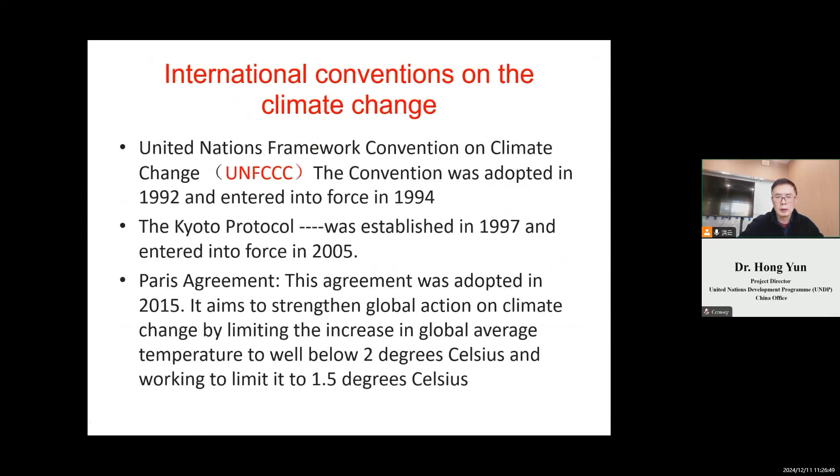We also have another environment convention for protection of the ozone layer. I think everyone maybe knows the program for ozone layer protection. It is derived from the Vienna Convention for the Protection of the Ozone Layer. The convention was signed in Vienna, so we call it the Vienna Convention for the Protection of the Ozone Layer. And based on the Vienna Convention, the parties held the meeting in Montreal, and we adopted the Montreal Protocol under the Vienna Convention.

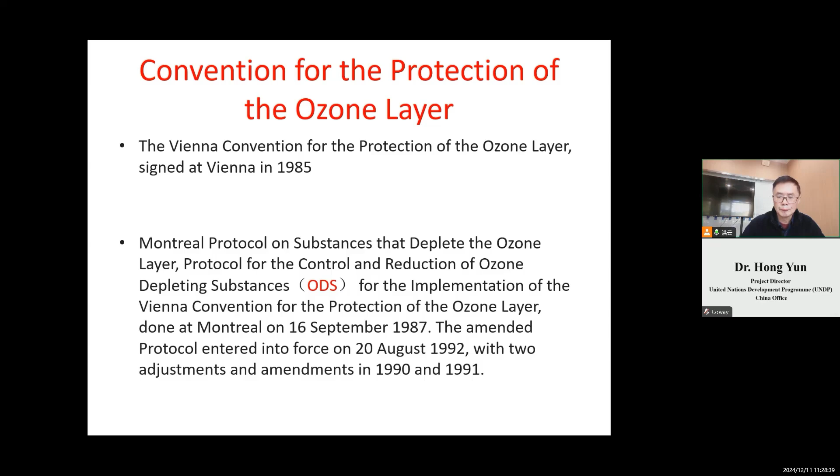The Montreal Protocol was signed on 16 September 1987, and the protocol was amended on 20 August 1992, and in the amendments we made some adjustments, respectively in 1990 and 1991. The Montreal Protocol stipulated that substances such as CFCs will be phased out by 2010, and eliminate or phase out HCFC substances by 2030.

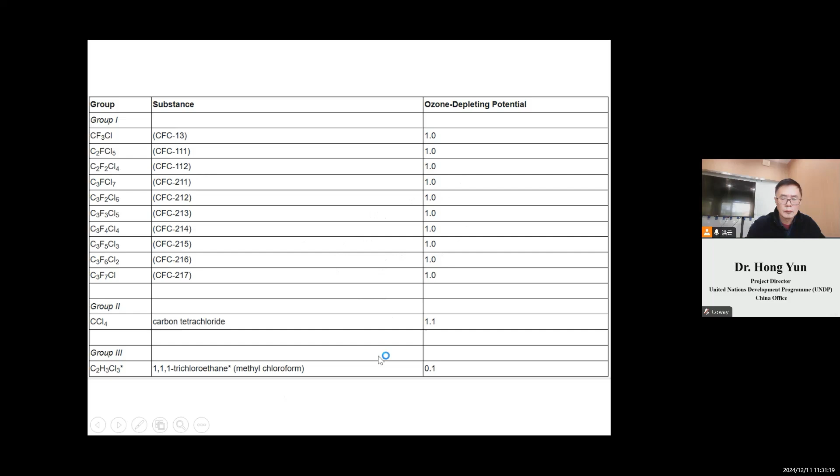So this is also the list of CFCs under the Montreal Protocol. Because CFCs are artificial chemicals, they are very harmful to the ozone layer. But now I would like to introduce CFC uses. CFCs are widely used in industries and in products covering various parts of our lives. For example, we have CFCs for refrigerants. You can see from here, these are the refrigerants of CFCs and HCFCs.

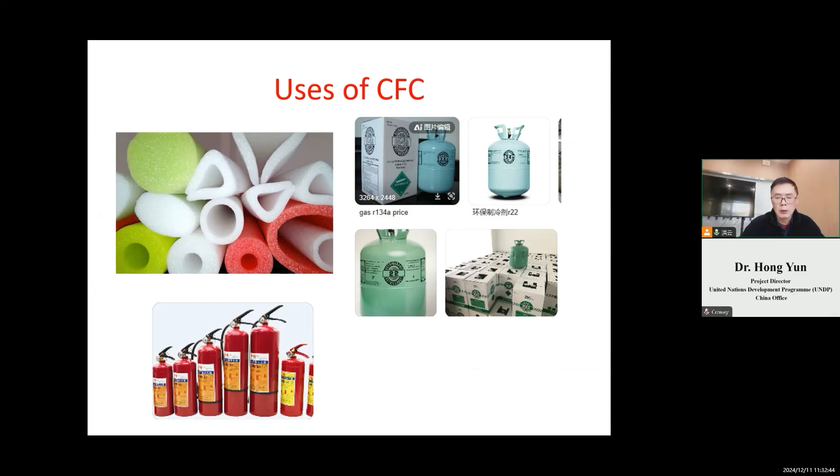And CFCs are also used in the foam sector. This is the foam picture, and also extinguishers use CFCs like halon, halon 1211. Those kinds of substances are very harmful to the ozone layer. And also in the refrigeration sector, in China, the refrigeration sector is divided into two kinds. First is AC, that is air conditioners, like this air conditioner.

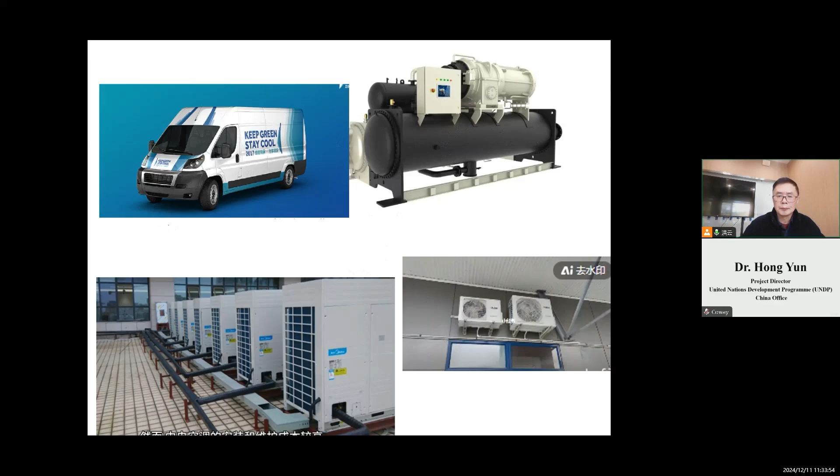The air conditioners are also installed in vehicles like cars and minibuses, and we also have commercial and industrial products, and that kind of equipment consumes a lot, maybe 300 kilograms to several tons of CFCs. So CFCs faced the phase-out timeline; according to the Montreal Protocol, all these substances were eliminated before 2010.

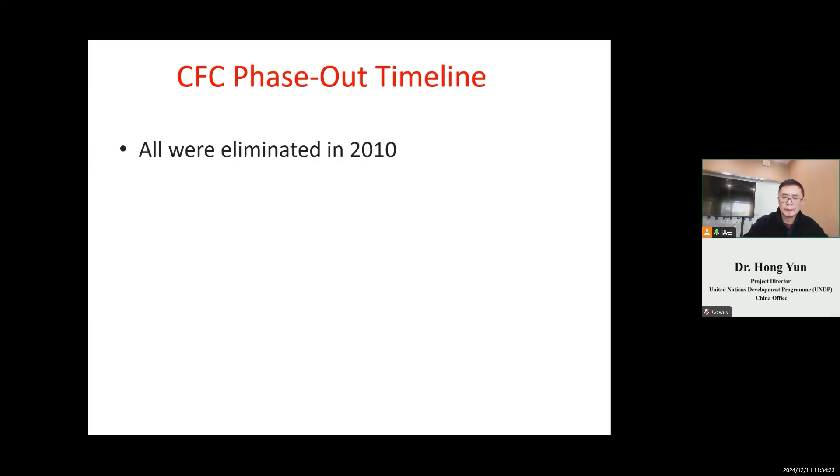This is the list of HCFCs. Compared with the CFCs, the ODP, ozone depleting potential, of HCFCs is very low, but they are still very harmful to the ozone layer, because every year the world consumes about 1 million tons of HCFCs. HCFCs also have a global warming potential. For example, HCFC-22's GWP is 1,810. It is also very big.

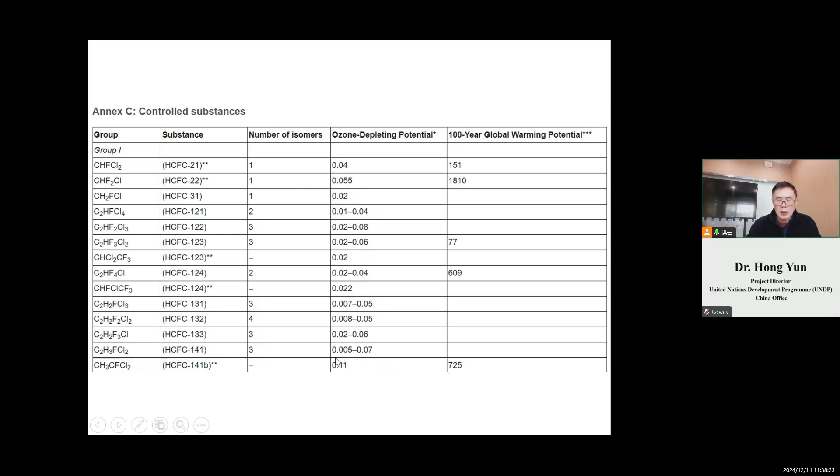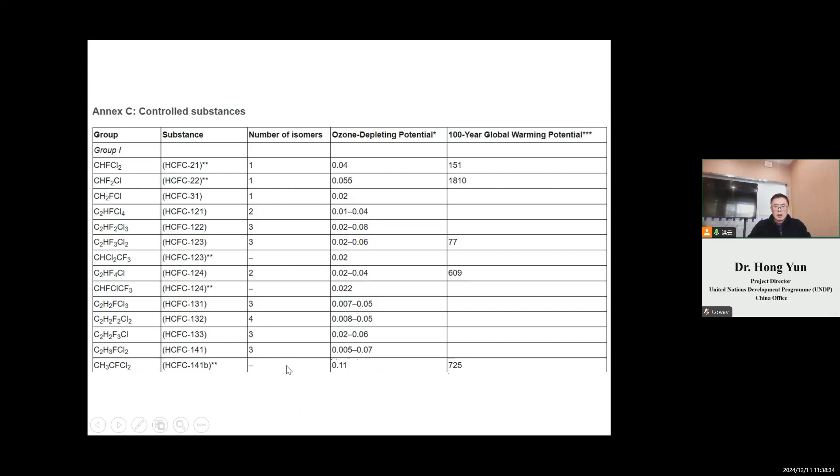Here is the list of HCFCs. We also have HCFC-141b, whose GWP is 725. It is of very high GWP. In the list of HCFCs, the main chemicals are HCFC-22 and HCFC-141b, because HCFC-22 is used for refrigerants, and HCFC-141b is for the foam sector. So in China, we consume a lot, about 300,000 tons to 400,000 tons a year.

These are the HCFCs. We also have another list of HCFCs, and for other kinds of HCFCs, the GWP is very low, but they still have GWP.

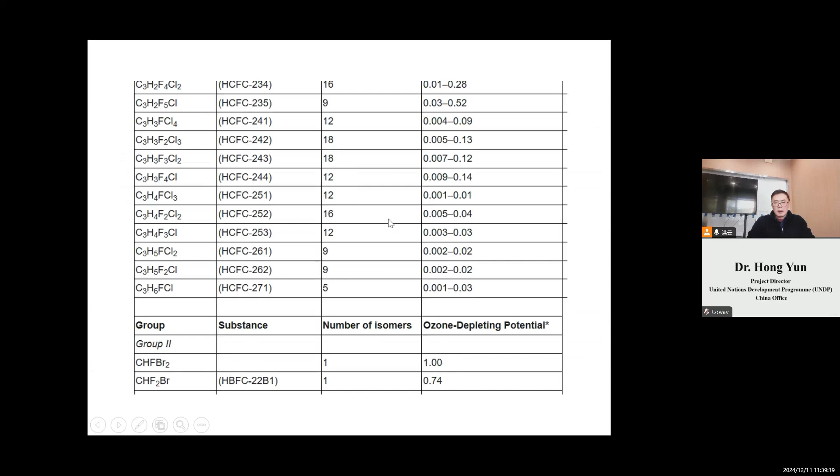Now, I would like to introduce the work to phase out HCFCs in China. China has some new kinds of technologies and does some research. We are doing the work to phase out HCFCs. In household air conditioners, we use the hydrocarbon propane, which according to the refrigerant category is called R290. This is a hydrocarbon material, so the GWP is very low and the ODP is 0. Now we mainly use R290 to substitute HCFC-22 in the air conditioner sector in China.

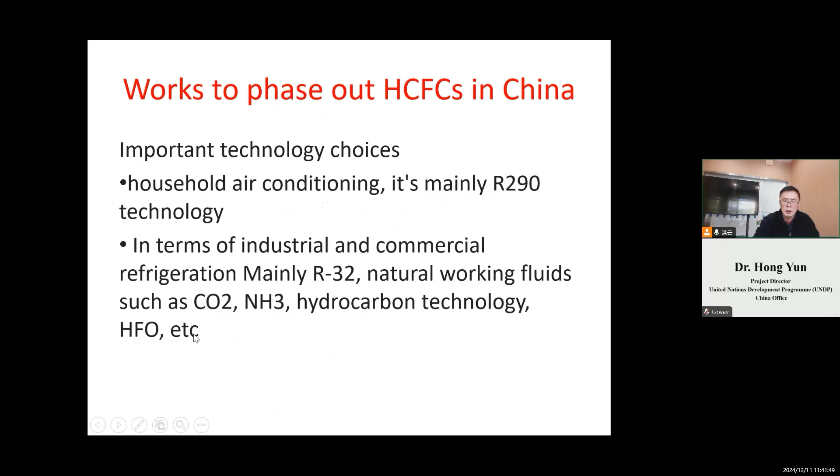In industrial and commercial refrigeration, now we mainly use R32, and we also use some natural working fluids like CO2, ammonia, hydrocarbons, and also HFOs. In China, we have a lot of projects in Haier, Midea, Gree, Dalian Refrigeration, Yantai Ice Wheel, Dunan Environment, and Hisense. We have also phased out HCFC-141b in the foam sector, mainly for foam panels. We also use HCFC-141b as a clean agent in the solvent sector.

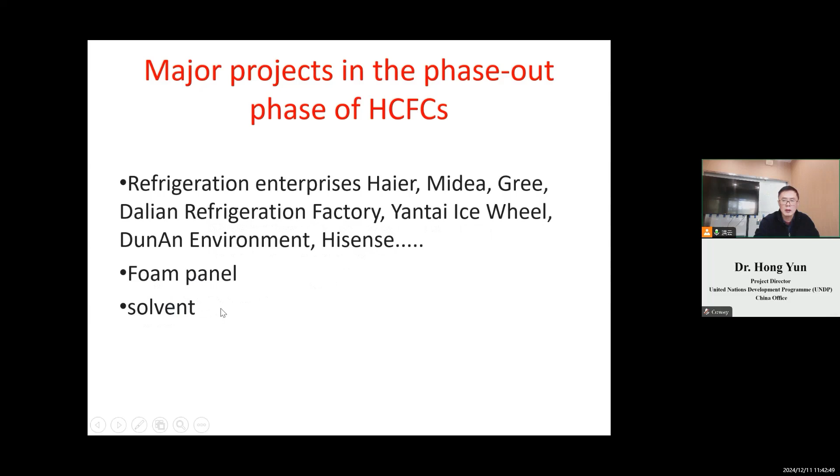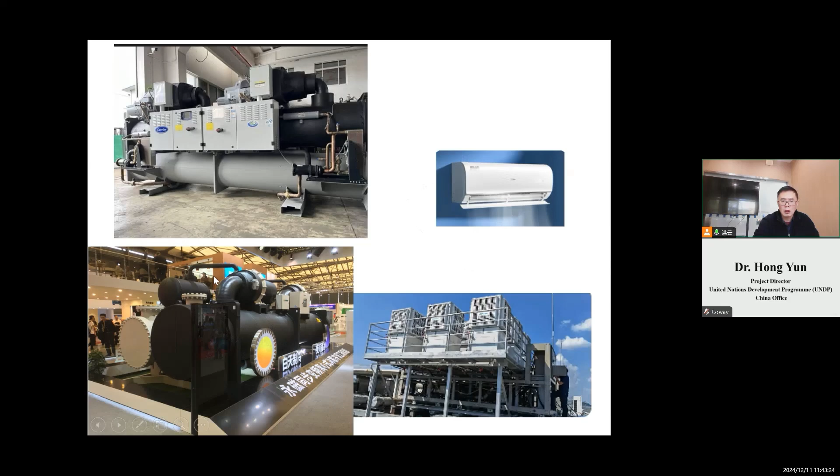This is the picture of commercial refrigerators. In China we now use R290 to substitute HCFCs, and this is the picture of the industrial and commercial refrigeration system. This is the foam sector with foam panels. The foaming agent is HCFC-141b, which has very high GWP. So when we do the work to phase out HCFCs in the foam and refrigeration sectors, we not only contribute to ozone layer protection, but also to climate change mitigation. This is the foam panel for the refrigerator; the panel includes the foam.

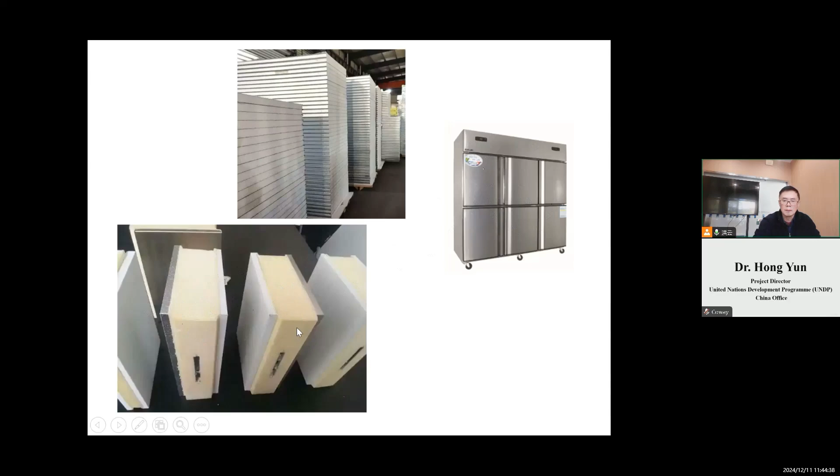I would also like to introduce the Kigali Amendment to the Montreal Protocol, which includes HFCs. HFCs are actually not ozone depleting substances, but they have very high GWP. HFCs derived from the process to phase out HCFCs and CFCs, so HFCs were included in the Montreal Protocol, specifically in the Kigali Amendment. It was adopted in October 2016, when the Meeting of the Parties to the Montreal Protocol was held in Kigali, Rwanda. So we call it the Kigali Amendment.

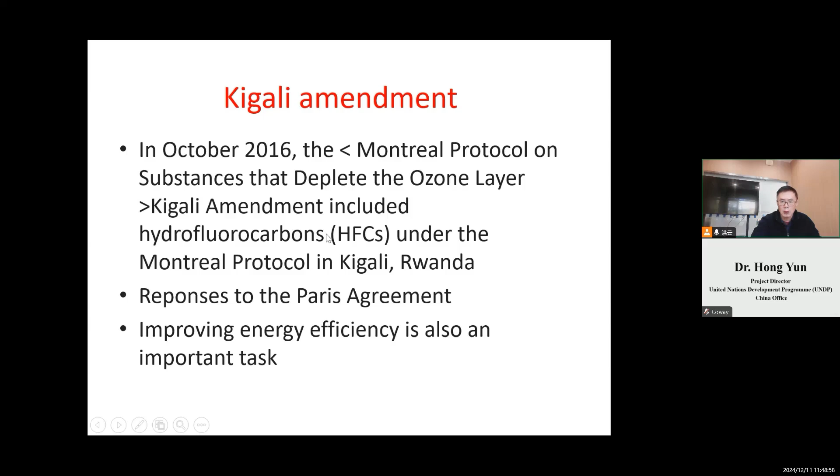But according to the estimation of scientists, with the Kigali Amendment and the Montreal Protocol, if we phase out all the HFCs, CFCs, and HCFCs, we can achieve the target of 0.5 degree Celsius. So the Montreal Protocol can contribute 1/4 or 1/3 of the temperature reduction. So the Montreal Protocol is very important for ozone layer protection, but also very important for climate change.

Now we would like to introduce some requirements for China to restrict the production and consumption of HFCs in China and also in Article 5 countries. What are Article 5 countries? In the Montreal Protocol, we have a definition for Article 5 countries. Article 5 defines the countries by their consumption of ODS or HCFCs per capita. We call those countries Article 5 countries.

We also have another article, Article 2. Article 2 countries consume more than the Article 5 countries. So Article 5 countries, in other words, are mostly developing countries.

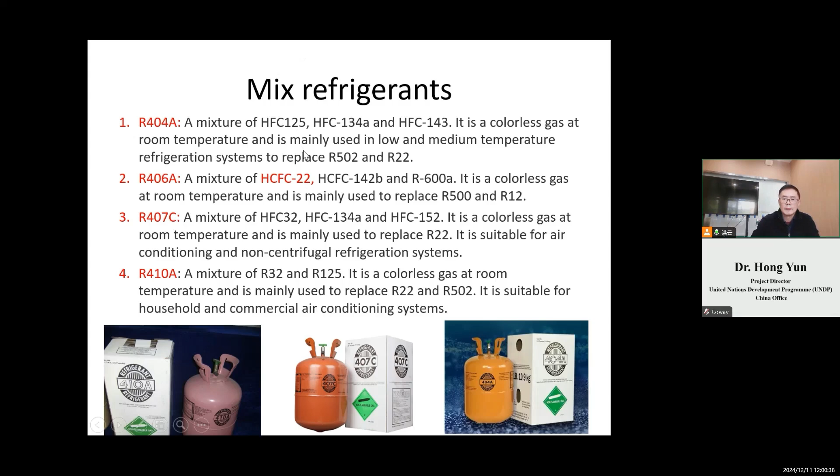Now, in order to phase out HFCs and HCFCs, in China we have been doing research on natural refrigerants, for example ammonia, CO2, hydrocarbons, and also a new kind of material, HFOs. HFO is an artificial, man-made material developed by Honeywell in the USA. The problem with HFO is that although it has zero ODP, it still needs testing of its effects on human health.

Also, the price of HFO is very high. For example, now in China in the AC sector, if we use HFO as the refrigerant, its cost can cover the whole price of the other refrigerant. So in China, the HFO price is very high. I think it is more than 200,000 US dollars a ton. So you can see the price is very, very high.

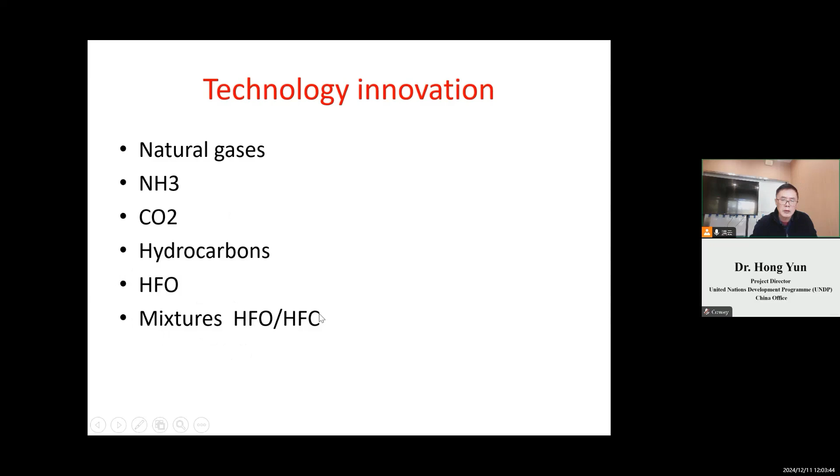That also hinders the use of HFO in the refrigeration sector and the foam sector. HFO can be used for refrigerants and also as foam agents. We also have mixtures in order to reduce the price and the GWP of the refrigerant. China also cooperated with some developed countries to develop mixtures of HFO and HFCs. For example, this is a mixture of HFO and HFCs.

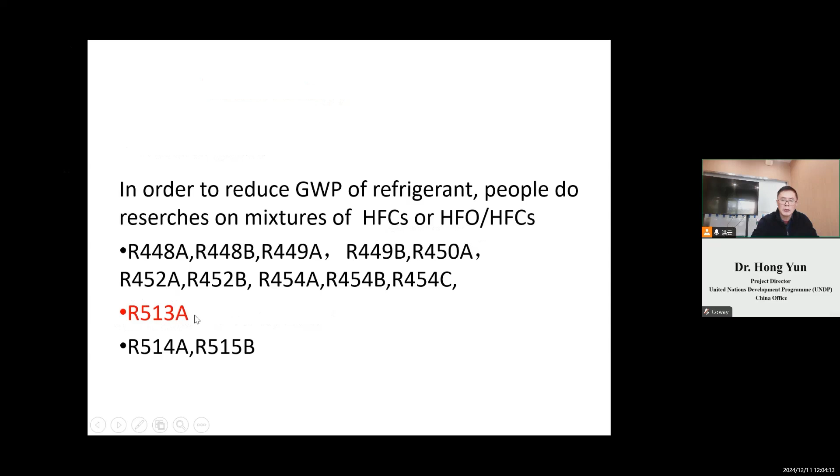I would like you to pay some attention to R513A. This material is a mixture of HFO and HFCs, HFO and 134A. In this way we can reduce the GWP of this material. For example, it has 56% lower GWP. Because the GWP of HFO is 0, and the GWP of the HFC, which we call R134A, is 1,430.

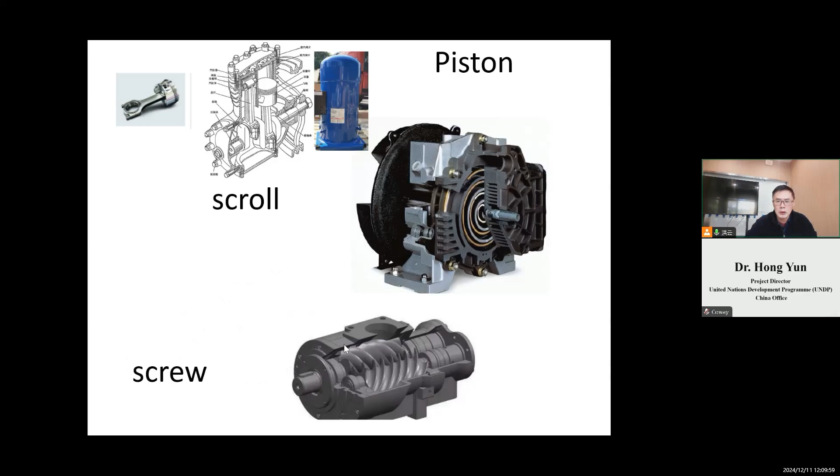And also in China, in order to have green refrigerants, we use CO2 technology and ammonia technology. CO2 is non-toxic, non-corrosive, and also non-flammable. So it is a good refrigerant. But the problem is, with CO2 as a refrigerant, the pressure of the system is very, very high. So we can combine CO2 and ammonia together to have a new system.

In China, a lot of engineers and scientists work together to develop the ammonia CO2 cascading system. This kind of system substitutes R22, and not only phases out ODS or HFCs, but also gets more than 15% energy saving. In a cascading system, the CO2 and ammonia have separate refrigeration systems and they work together.

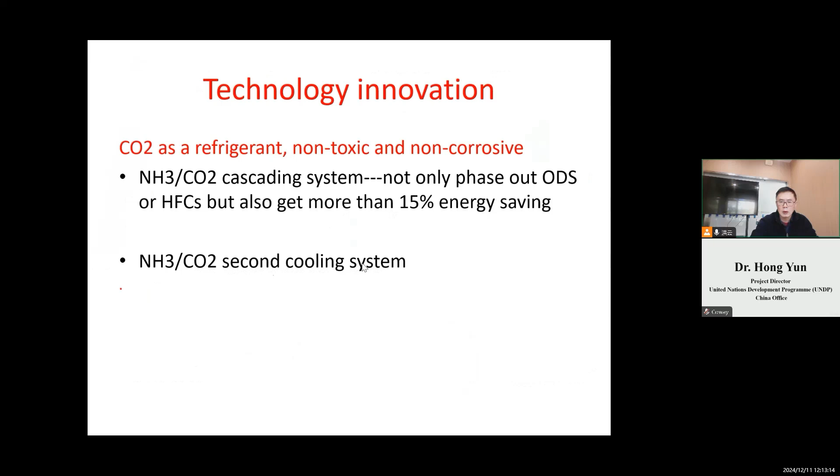But we also have CO2 as a secondary cooling system. For this system, the CO2 is not the refrigerant. It only takes the cold produced by ammonia for the application.

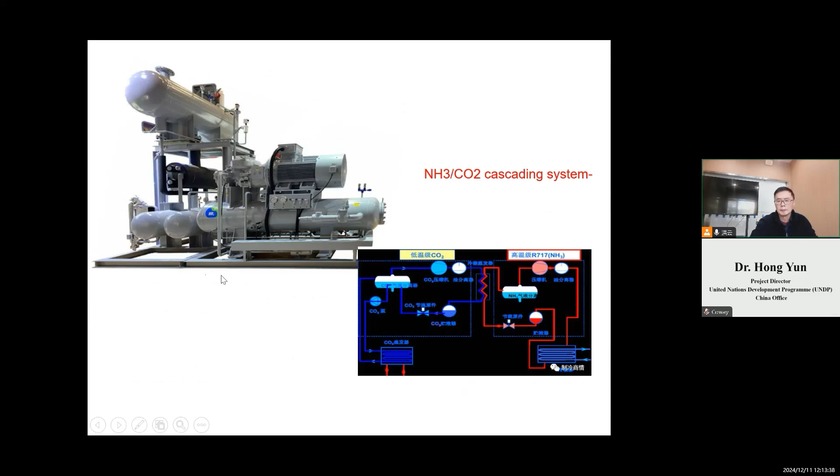So now I would like to say something about the challenges of China. China is the world's largest refrigerant producer and manufacturer of refrigeration equipment. As you know, last year China exported air conditioners to the whole world, about 70 million units.

China is also the largest refrigerant producer. We not only produce HFCs, but also HCFCs, and China is also the largest exporter. So China faces very heavy pressure from the implementation of the Montreal Protocol and Kigali Amendment. China has also led research and development of natural refrigerants like ammonia, CO2, and hydrocarbons in the different sectors.

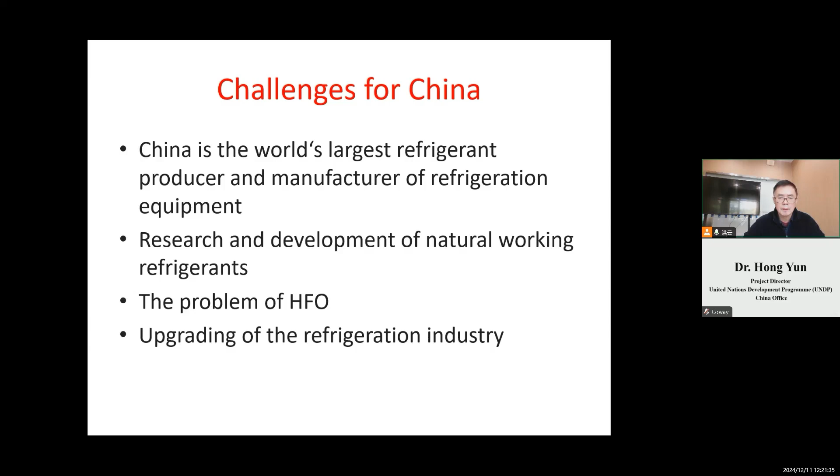So in the future, we have some important sectors, especially for the Kigali Amendment, because HFCs are currently used to phase out HCFCs. In room air conditioners, we have a lot of products still using HCFCs and HFCs, and we have a lot of industrial and commercial refrigeration. So this kind of sector is also very important.

And now in China, all Chinese cars use HFC, R134A, as a refrigerant. And in China, information and computer science are booming now, so we have a lot of data centers. The data centers consume a lot of electricity and energy. So we also face those kinds of problems in those industries.

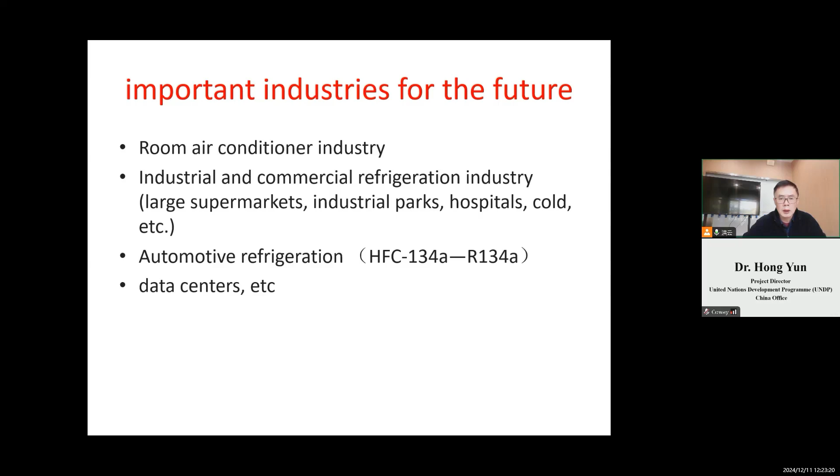But for the Montreal Protocol, we are not only focused on the materials, but we also pay much attention to energy efficiency. You know, 1/4 of the power or electricity in China is consumed by the refrigeration industries in China. So it occupies a lot of electricity. So in China, the refrigeration sector is very important for China to achieve the carbon peak and carbon neutrality targets,

and also substitution of the refrigerants. In the new products, we are using some new refrigerants, but some of the old equipment still uses CFCs and HFCs, and for those old refrigeration equipment at the end of life, the recovery and recycling of the existing refrigerants is also very important.

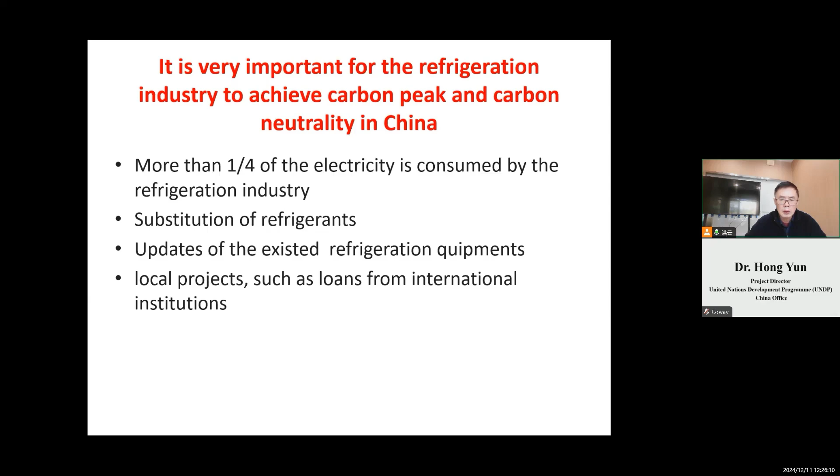So in China, we also have some local projects, for example with the AIIB and ADB, the Asian Development Bank, for these kinds of loan projects to use green energy, green electricity, like photovoltaic electricity or hydropower electricity for that kind of equipment.

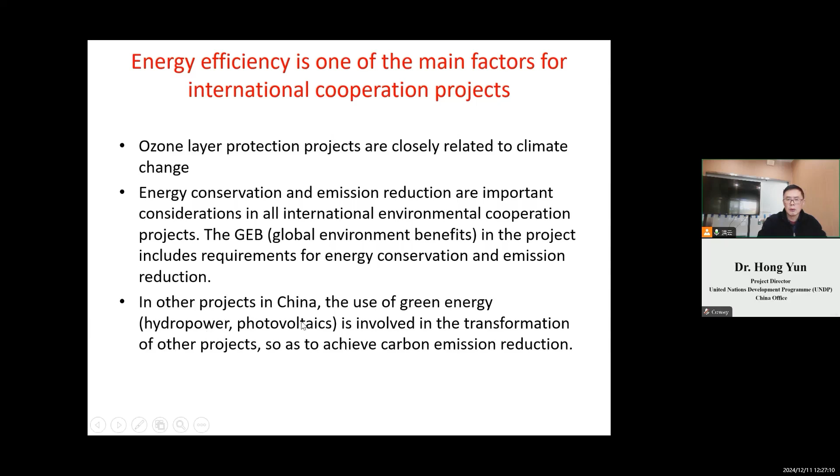So I would like to say the ozone layer protection projects are closely related to climate change. Energy conservation and emission reduction are important considerations in all international environment cooperation projects. So the GEB, that is global environment benefit, is included in the requirements for our projects. In other projects, we also encourage enterprises in the innovation of equipment or technology. We encourage the use of green energy, like hydropower and photovoltaic energies.

Now I would like to give you a brief introduction about the projects in UNDP China. The first is phase out of HCFCs in the industrial and commercial refrigeration sector. As I said in the introduction of the Copenhagen Amendment, now we are in the second phase, stage 2. That is to phase out 30% of HCFC consumption by 2025. In China, we have got 32 million US dollars to phase out HCFCs in this kind of sector.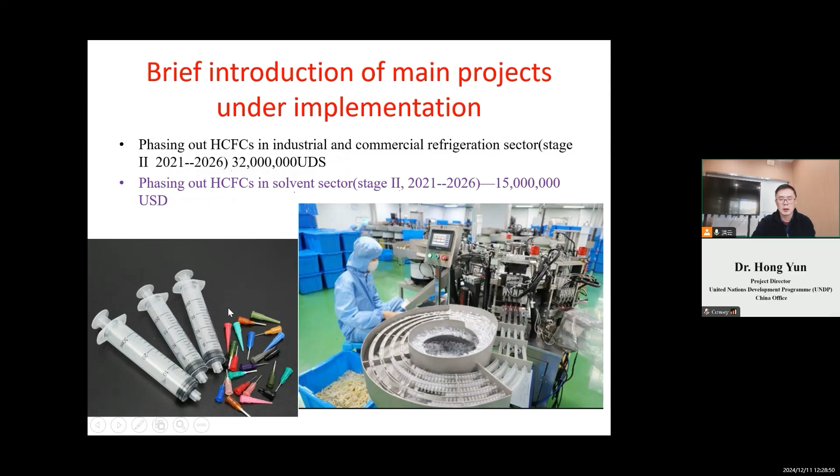We also have the second phase, stage 2, for the solvent sector. This is the solvent sector. This is a syringe. We use some HCFCs as the solvent in this kind of sector. This is the syringe production workshop. This is the syringe. They use HCFCs.

Now in China, we also have the demonstration of phase out of mercury-containing medical thermometers and sphygmomanometers. So in the medical sector, China needs to phase out the mercury. The production of these thermometers and sphygmomanometers must be stopped from the beginning of next year. That is January 2025. China must stop.

But in the market, we still have some thermometers and sphygmomanometers still in use. But new production will stop. This is the mercury, and these sphygmomanometers also use mercury.

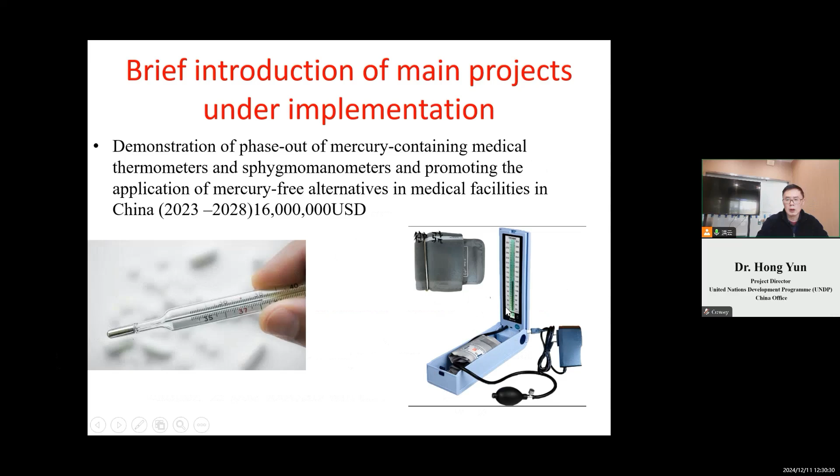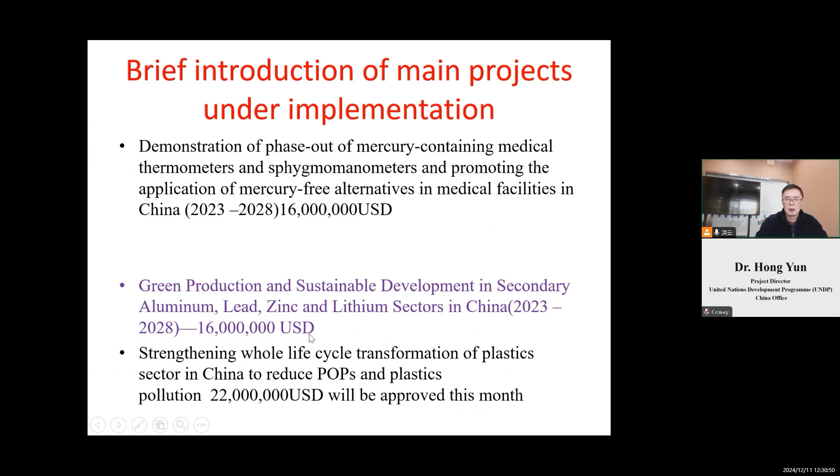We also have the projects in the recycled aluminum, lead, zinc, and lithium sectors. This project is $16,000,000 US. This is the recycled lead, the lead battery company in the picture. This is the recycled aluminum.

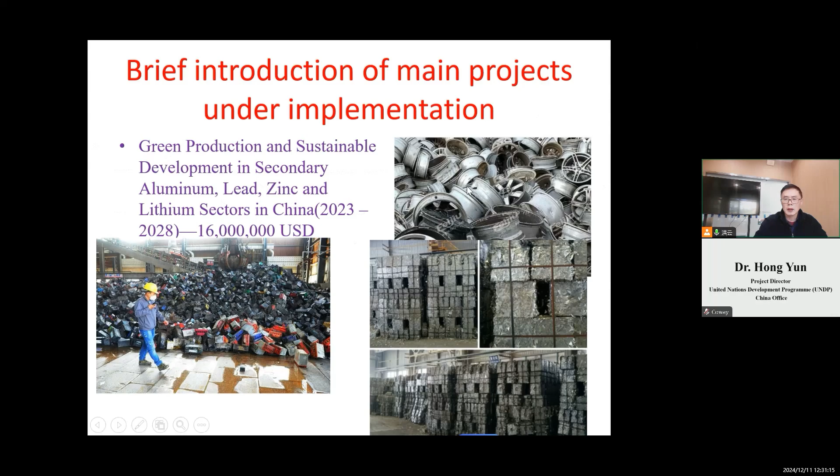And in China now we also plan to have projects for the plastics sector. For the plastic projects, we got the news that the 68th board meeting of GEF will be held from the 16th December 2024. So the project will be approved actually this month. We applied for 22 million US dollars. With that kind of project we will reduce the POPs and plastic pollution.